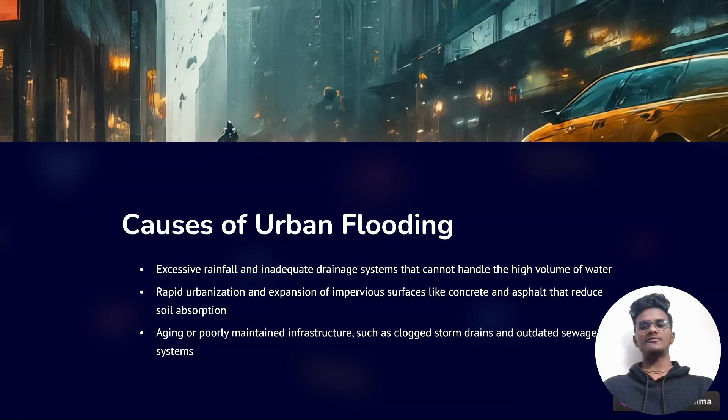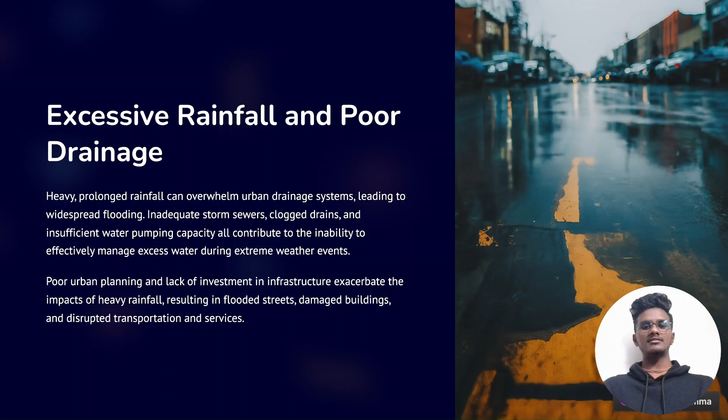Excessive rainfall and poor drainage. Heavy prolonged rainfall can overwhelm urban drainage systems, leading to widespread flooding. Inadequate storm sewers, clogged drains and insufficient water pumping capacity all contribute to the inability to effectively manage excessive water during extreme weather events. Poor urban planning and lack of investment in infrastructure. The impact of heavy rainfall results in flooded streets, damaged buildings and disrupted transportation and services.

Inadequate infrastructure and urban development. Poorly planned and aging urban infrastructure, outdated drainage systems, inefficient flood barriers, and development in low-lying areas can exacerbate the impact of heavy rainfall and rising water levels. Rapid urbanization and construction without proper measures can block natural water channels and increase impermeable surfaces, leading to reduced absorption and increased runoff during floods.

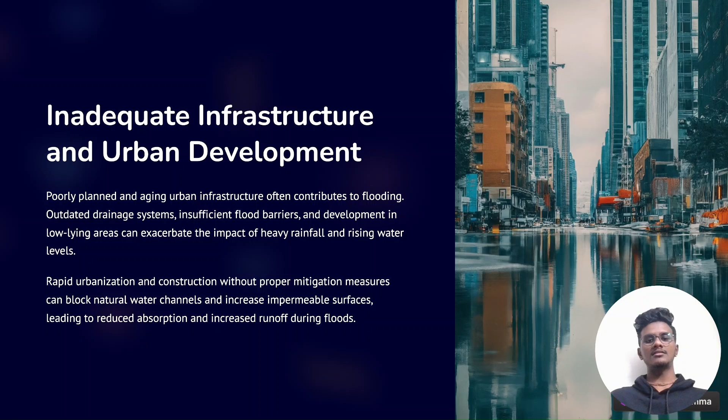Climate change and rising sea levels. As global temperature rises, sea levels are climbing due to melting glaciers and ice caps. This poses a grave threat to coastal cities, which face more frequent and severe flooding during heavy rainfall and high tides. Urban areas built on low-lying lands are particularly vulnerable as encroaching waters submerge streets, damage infrastructure and disrupt communities.

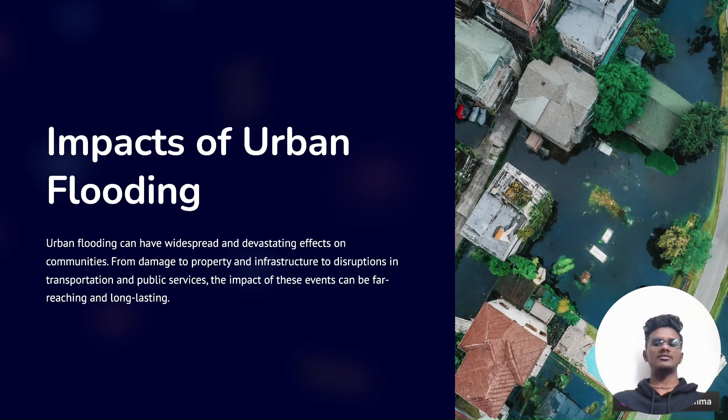Impact of flooding. Urban flooding can have widespread and devastating effects on communities, from damage to property and infrastructure to disruptions in transportation and public services. The impact of these events can be far-reaching and long lasting. Damage to property and infrastructure. Structural damage: flooding can cause extensive damage to buildings, roads, bridges, and other critical infrastructure. This leads to costly repairs and disrupted daily life.

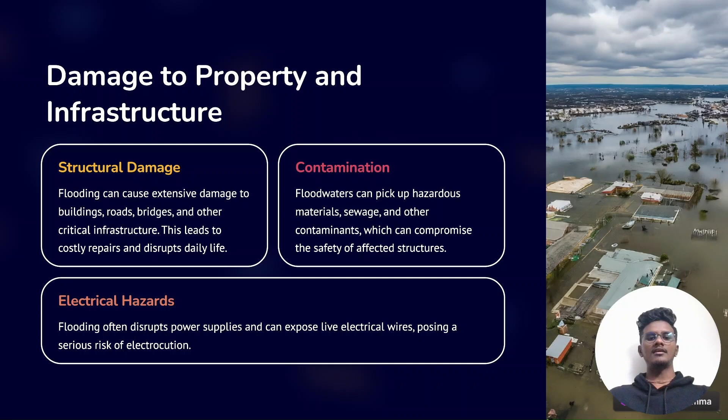Contamination: floodwaters can pick up hazardous materials, sewage, and other contaminants which can compromise the safety of affected structures. Electrical hazards: flooding often disrupts power supplies and can expose live electrical wires, posing a serious risk of electric shock. Disruption of transportation and services: blocked roads, suspended public transit, damaged infrastructure, utility outages.

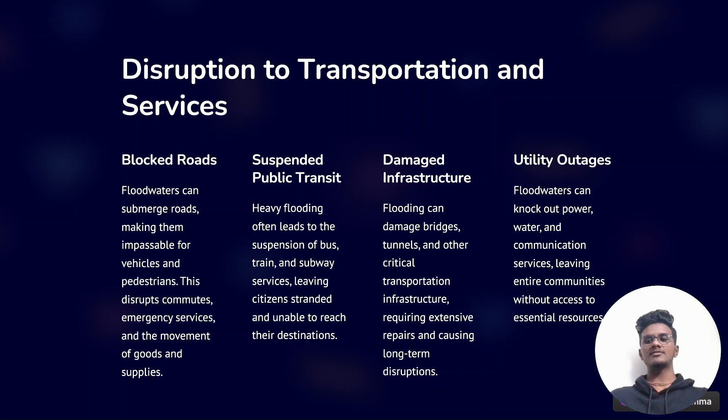Floodwaters can submerge roads, making them impassable for vehicles, and this disrupts emergency services and movement of goods and supplies. Suspended public transit: heavy flooding often leads to the suspension of bus, train, and subway services, leaving citizens stranded and unable to reach their destination. Damaged infrastructure: flooding can damage bridges, tunnels, and other critical transportation infrastructure, requiring extensive repairs and causing long-term disruption. Floodwaters can knock out power and communication services, leaving entire communities without access to essential resources.

Public health and safety concerns: disease spread, injury and drowning, contamination, mental health impacts. Floodwaters can carry bacteria, viruses, and other pathogens, increasing the risk of waterborne illnesses like cholera, typhoid, and hepatitis. Injuries and drowning: rapid floodwaters pose a serious drowning hazard and can lead to cuts, bruises, and other injuries. Contamination: floodwaters can mix with sewage, chemicals, and other pollutants, contaminating drinking water and exposing residents to toxic substances.

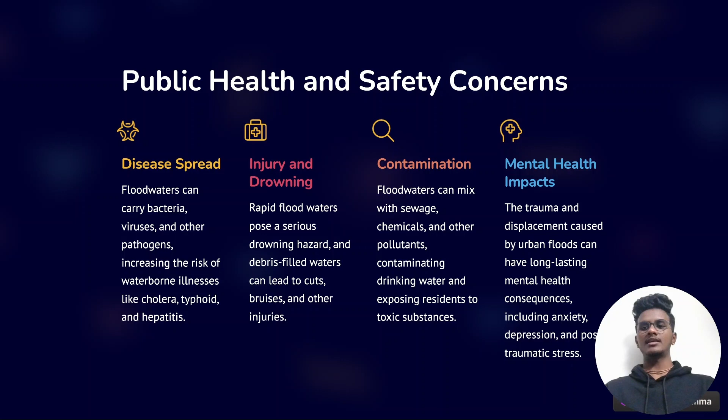Mental health impacts: the trauma and displacement caused by urban floods can have long-lasting mental health consequences, including anxiety, depression, and post-traumatic stress. Strategies for flood control and mitigation.

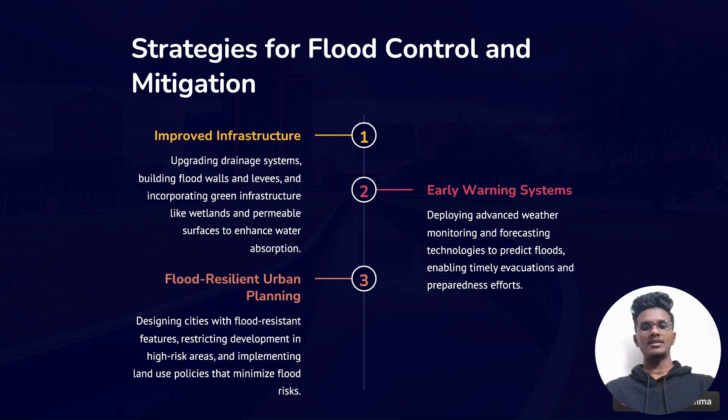First, improved infrastructure: upgrading drainage systems, building flood walls and levees, and incorporating green infrastructure like wetlands and permeable surfaces to enhance water absorption. Second, early warning systems: deploying advanced weather monitoring and forecasting technologies to predict floods, enabling timely evacuation and preparedness efforts. Flood resilient urban planning: designing cities with flood resistance features, restricting development in high risk areas, and implementing land use policies that minimize flood risk.